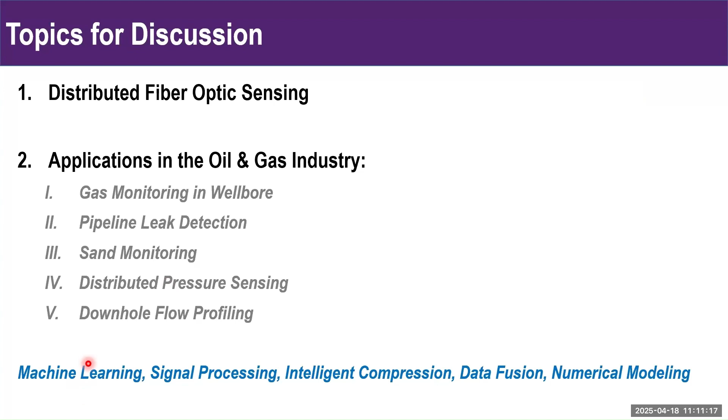All of these different applications I'll share are from my research group, and throughout these different application areas, you'll see how we used machine learning, signal processing, intelligent compression, data fusion, and numerical modeling. All of those different techniques will be built into each of these case studies that I'll present.

The spectrum of that light gives us a lot of information about different physical variables such as temperature, strain, and so on. Now, the biggest advantage of distributed fiber optic sensors versus traditional gauges is the distributed sensing capability. Hence we have distributed in the name, which means the entire fiber is acting as a sensor, versus a point sensor or point gauge, which only provides information at one location.

So say if we have a 500 foot long fiber, we'll have 500 feet of sensing. So we have very high spatial resolution of data, and that gives us a much better understanding of the dynamic environment. For instance, in a well bore, which can be thousands of feet long, especially in offshore wells, or in pipelines with hundreds to thousands of miles crisscrossing the country, a few discrete gauges will not give us the full understanding of the dynamics of the process. That's where distributed sensors are a game changer, because the entire fiber is giving us this information.

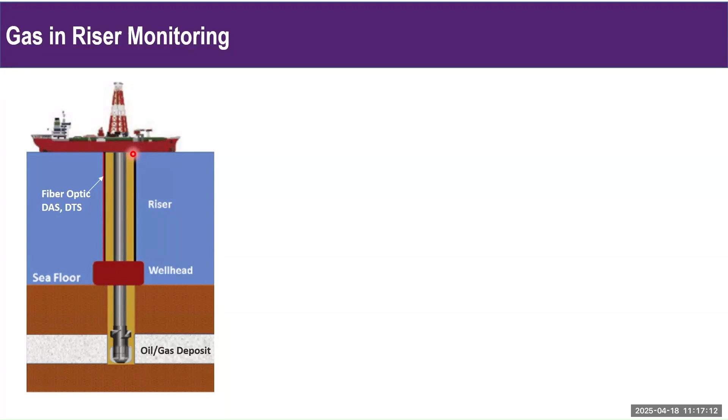Sadly, this is what happened during the Deepwater Horizon blowout incident in 2010, when hydrocarbon gas entered the wellbore and was not detected in time, creating an explosion on the platform, and sadly many people lost their lives. So we wanted to come up with sensing technology that can help prevent this from happening.

One of the challenges with the current state of the art is that we typically have sensors only on the wellhead and on the platform, but as you can see in the schematic, the whole wellbore is very, very long.

Even between the platform and the seafloor, we have what's called a riser, which can be thousands of feet long. So we have sensors at only a few locations, in this case the platform and wellhead, and we don't have a good understanding of the fluids in between, thousands of feet of basically a blind spot.

That is what creates a very dangerous situation, because many times these hydrocarbon gases are dissolved in the fluid. Because they're dissolved, they might suddenly come out of solution as the pressure is lower at shallower depths, and now we have hardly any time, because maybe the gas is 100 feet below our platform and will quickly rise up, and we just don't have time to control that, creating these types of accidents.

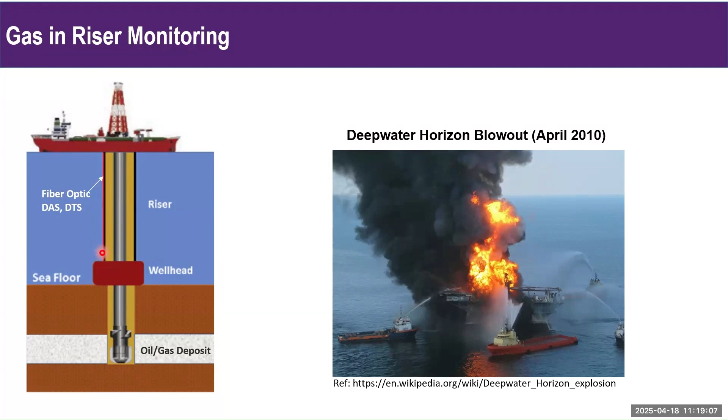This is where we believe fiber optic sensors can be a game-changing technology, because if I have a fiber optic sensor across these thousands of feet of riser, if gas comes in at any location along the riser, we can have an understanding of this anomaly and we'll have time to control it. As opposed to a point sensor, the fiber optic sensor gives us sensing along the entire fiber. This is the hypothesis we wanted to prove with our downhole test.

LSU has a very unique facility where we have six full-scale wellbores up to 5,000 feet deep. These wellbores are on our campus, which gives us a unique capability to do tests in a wellbore that we own.

Here you can see the picture where we installed DAS and DTS on one of our existing wellbores. DAS is distributed acoustic sensor, DTS is distributed temperature sensor. They were both within the same cable—it's one cable we are installing which has multiple fibers inside it.

This shows our well schematic. You can see that this well is 5,000 feet deep, so it's a full-scale wellbore. The casing is 9 and 5/8 inches, and the fiber is installed on the tubing.

We are trying to mimic the riser with our well, and we want to show that if we have a fiber in this type of setup, and gas is introduced, mimicking a gas kick that can cause a blowout, entering the well from the bottom of the tubing, then we can detect it with this fiber in the well.

One thing I'd like to mention is that during the drilling process, this safety hazard occurs during drilling or sometimes during the completion process. We typically have drilling fluids which are mud—if you think of mud, it literally looks like mud, a very thick fluid with a bunch of clay and lots of chemicals, a very viscous fluid in the wellbore.

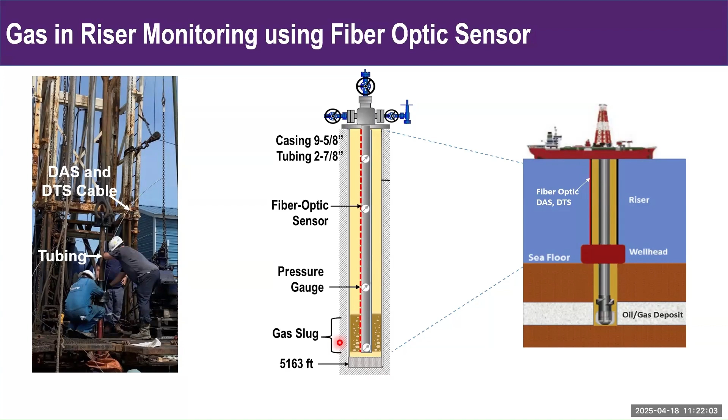So imagine the challenge here where we are trying to detect a very small bubble while it is still deep below, because if we detect it very close to the platform, then we hardly have any time to do any kind of control procedure. So we want to detect it while it is still away from our platform, deep below the formation. But it's a very noisy environment because you have mud circulating at very high rates. When we are drilling a well, you have very high flow rates, hundreds of gallons per minute, you have drill cuttings, and it's a very loud environment. Then you have mud as our other fluid, which is going to disguise the gas signal. So there's a lot of challenges in terms of detecting it.

We also use it to calculate the velocity, how quickly it is coming up. We call it a frequency wave number transformation of the data. Again, there are a lot of different techniques, and I'll show some references where you can go and look at the mathematical details of this transformation. But the key point is that just putting a fiber in the well is not going to give us the information. We have to take that data, do a lot of denoising, signal processing, in this case transformation.

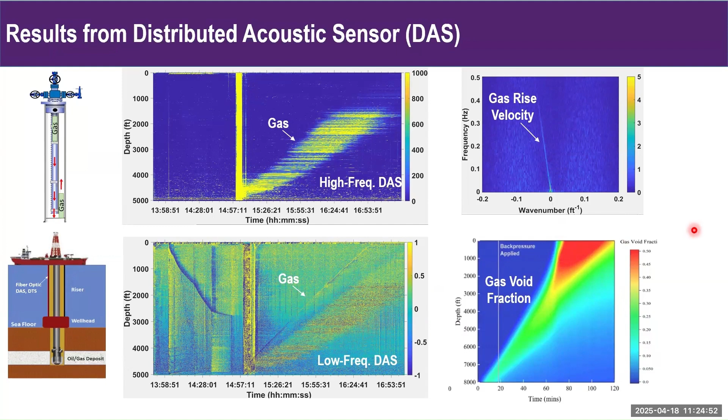So this is what we get using the fiber optic data.

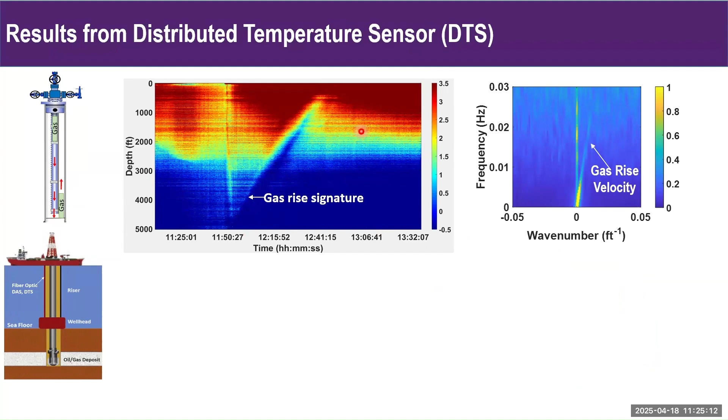We also use distributed temperature sensor. In this case, we are looking at the gradient of that, and you can again see the rise of gas. Again, you can imagine this can be a kick which is coming up the riser, and we can clearly see how quickly it is rising up. We calculate the velocity, and this gives us this information.

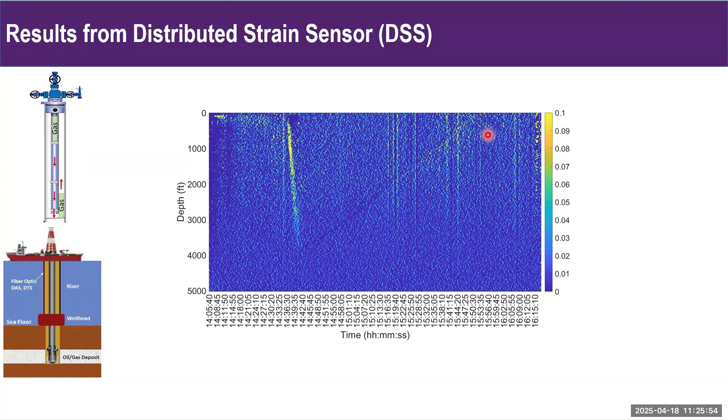Now, data compression is a very important aspect, because these sensors take measured data at high spatial resolution, high temporal resolution. We generate a lot of data.

So for instance, in a 10-second DAS data in our well, in our 5,000 feet well, is roughly 1 gigabyte, and this is just a 10-second data interval. You can see this equation which basically we use, so this is the spatial resolution, and our frequency of acquisition was 10 kilohertz. So 1 gigabyte in 10 seconds. Now imagine monitoring the well for several days, and it can even be sometimes even longer than that.

That is going to just generate an enormous amount of data that we cannot handle. And what makes it worse is if you are in an offshore kind of environment, we have very limited resources. We don't have a supercomputer on the rig floor, and neither do we have some kind of ultra high speed internet and so on. We rely on satellite data links to send our data. So a lot of this processing becomes a bottleneck very quickly.

You have this sensor, which is an awesome sensor giving so much data, which is great, but how do I actually analyze it quickly? So we have developed some methods. You can again look at these two references on how we compress our data. We also have some patents on the data compression, because this then we can convert it from gigabyte to kilobytes.

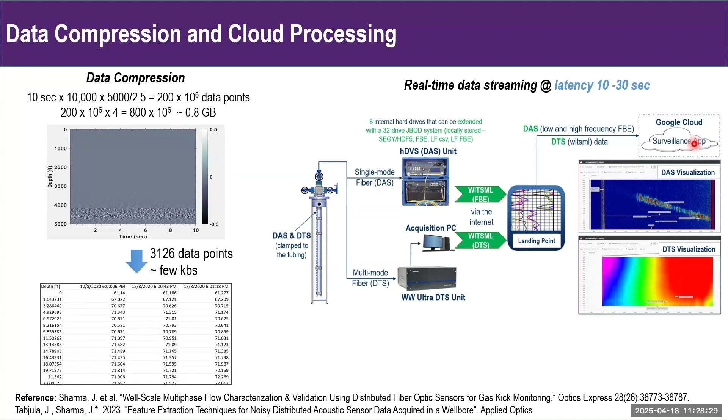In the end, in our wellbore as well, we compress the data and then we send it to a cloud server for further processing, because again, on a platform we will not have the computational resources. And even if it is not offshore, even in an onshore rig or onshore environment, these are remote places. We won't have high speed computers sitting in the field, so we have to send the data somewhere to a control site or centralized location for the analysis. So the data compression is a key step here.

And we also use machine learning to automate the process, because ultimately you may not have a fiber optic sensing expert who knows all this signal processing and can do all this in real time. So automating a lot of this so that the operators have an end-to-end solution is important.

So in this case, let me just show you. As the gas is coming into our wellbore, our MATLAB code - this is our MATLAB code running in the background - is automatically detecting the signal, as you can see here, and it is telling us the velocity as well without any human intervention. So this is fully automated. It's doing all the signal processing steps, from the compression, denoising, and then signal detection.

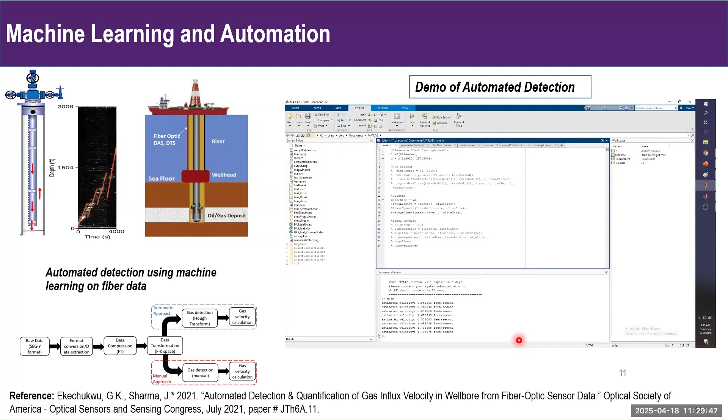And this is where our vision is, to make this technology viable for an oil and gas company, or any company for that matter, to utilize it in field application, because we do not have a fiber optic sensing expert available 24/7. And by the way, these drilling operations are 24/7, it can be in the middle of the night or whatever time. So automation is the key to make it faster and to make it viable for use, because as I mentioned, it's practically the best way to go forward with these sensors.

Now, again, going on the same machine learning scheme, we did a lot of different experiments with different gases, different circulation rates, different wellbore fluids. We wanted to create a repository so that when someone is testing things in the field, they can use some of our trained models and help in looking at those signals of interest in the field.

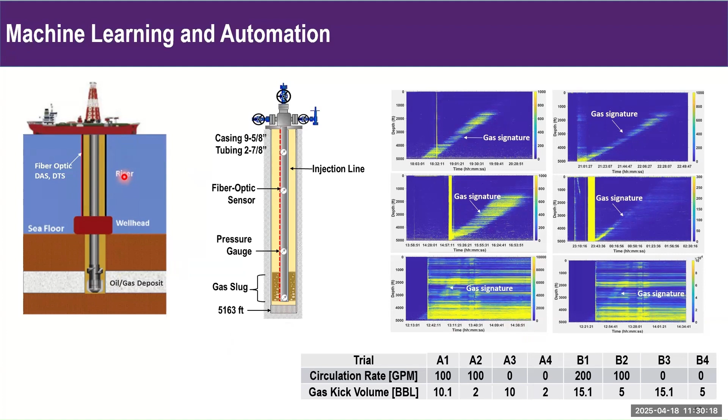There's a lot going on when we are drilling a well or producing a well. You have multiple fluids in the wellbore, circulating at high rates. There are drill cuttings, there's sand, there's very noisy signals which we have. And even in this case, with the gas being small bubbles, they have very weak signal as compared to others.

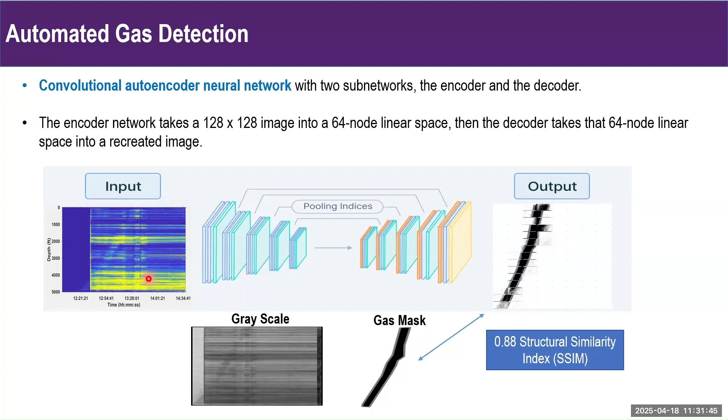So denoising this to actually get the final gas signal, as you can see, this is our mask, which is what an expert in fiber optic sensing will draw. So this is like our manual gas interpretation, and this is what the machine learning model predicts. We are trying to teach how to get from here to here by doing all those signal processing steps.

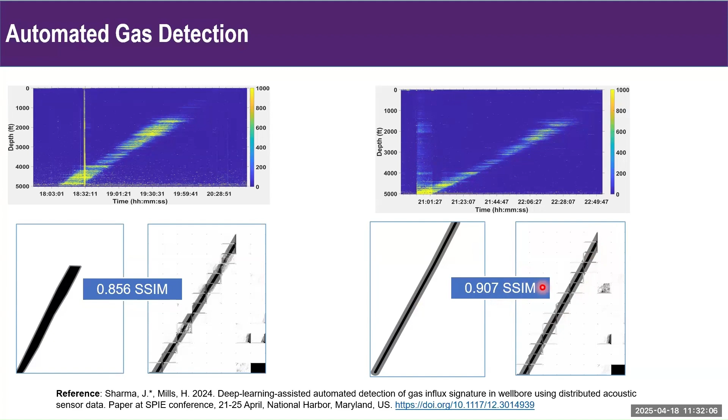That's where automation is going to be the way to make these sensors viable in the field. So we have done this on many different data sets, and it's not 100%. This SSIM is just a structural similarity index - we just see how closely the prediction is matching our own interpretation. So it's not 100%, but it is pretty good for practical use.

So I mentioned signal processing and denoising multiple times, and I cannot emphasize enough how important this is. Imagine if you have a 10,000 feet wellbore, and the signal that is coming from the 10,000 foot is actually much weaker because you have more optical losses the longer we go. Of course, technology has evolved to a place where we don't have a lot of signal losses, but still we have signal losses. So denoising is very important.

And doing frequency domain analysis is actually one of the key things that we do, along with a lot of mathematical transforms. Because when you have a broadband type of noise, we can isolate it in the frequency domain a lot of times. And sometimes once you transform the data mathematically, you can again isolate different types of signatures, and then you basically invert that. So that's kind of the high level way of doing this.

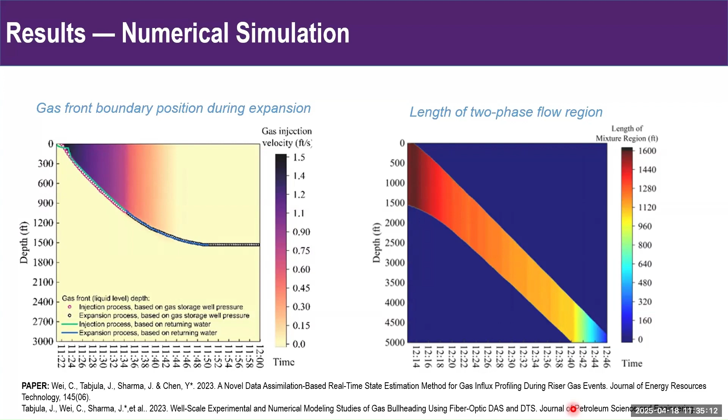Versus with a fiber optic sensor, for instance, in our case we have 5,000 feet of high spatial and high temporal resolution data. So in terms of validation of a numerical model, this is a very, very rich data set. And I would say that that is the biggest scope for any application in distributed sensors - to validate the digital twins and come up with a verified model that can be then upscaled to any kind of operating condition.

Leak monitoring is another big application of these sensors. Pipelines are very long and you can have a leak at any location along the pipeline. Typically we have these pressure gauges at multiple locations, but if the leak is very small, the pressure gauge may not actually see the signal at all because the pressure change will be very small.

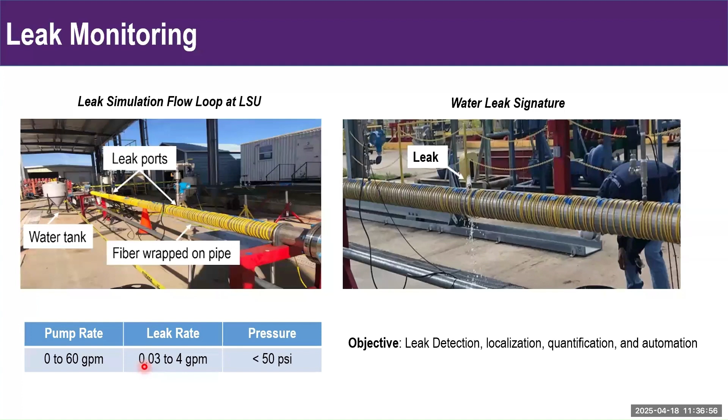Once again, the signal to noise ratio and denoising is very important here because the pipeline has all other things going on around it as well. So ultimately, how do we know the signal is from a leak versus something like a cow walking near the pipe, or a car going through, or, in this case, if it is an acoustic sensor, it's going to sense everything in the environment.

But the takeaway message is that if I just go and buy a fiber and put it on whatever structure I'm monitoring, that alone is not going to give you all the answers. It's how you then take this data and process it such that we now see the useful information. This mapping is where a lot of effort needs to be put in, because a lot of times the signal is there, but it's just not clear enough. There's a lot of noise and environmental parameters that have to be removed to look at our signal of interest.

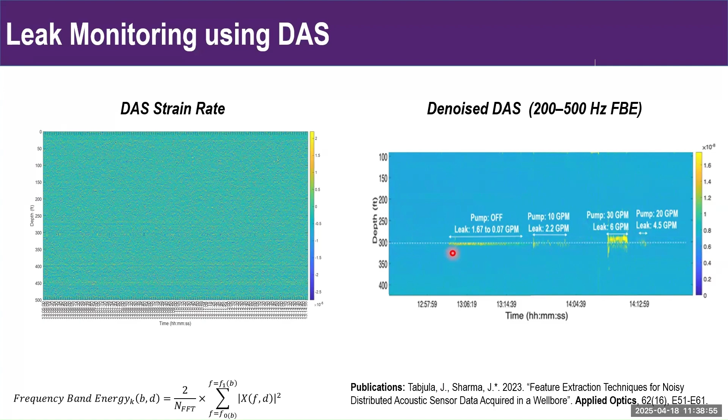I've already mentioned data size is an issue, and it is, because as you all know, pipelines are very long, so data compression is very important. The good thing about our transform is that it not only clearly shows our signal of interest, but also reduces the data size significantly. In this case, we are going from megabytes of data to kilobytes of data, which for a pipeline operator is very, very easy to handle. Our pipeline here is small, but even if these pipelines are very, very long, in most cases, it is data that you can handle.

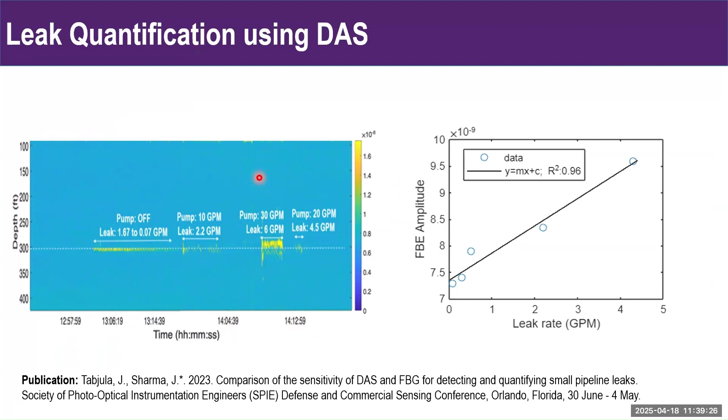We also use this to quantify the leak - how much is the leak? There's a quantification algorithm that we have developed both for pipeline and also for well bore. So if you have fiber in the well and you have these fluids flowing at different flow rates, how much is the flow rate? You can see here the intensity that we extract from the fiber optic measurement is converted into a flow rate using our algorithms, which you can see in this paper.

Although I'm not going into the details of all these processing steps because of limited time, what I do want you to appreciate is that the data can actually be used for many, many different things. The same DAS information I can use for leak detection, for measuring flow, for measuring velocities, and that is where the beauty of these sensors comes in. You can do a lot with it and develop high fidelity numerical models that are very well validated with a dense data set.

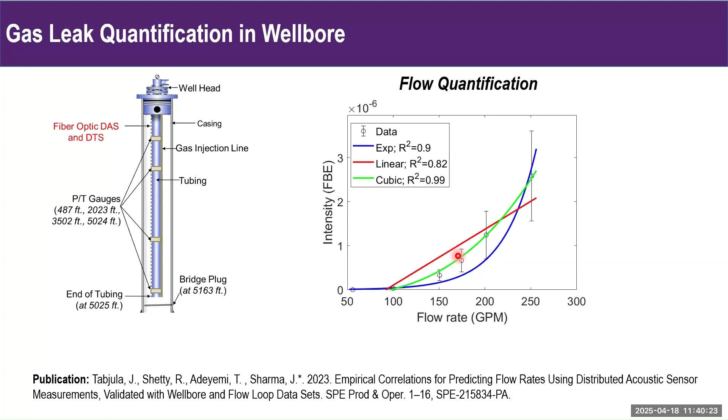Now, one thing we wanted to do here is, say if I only have a DAS - only a distributed acoustic sensor - what is my confidence of detecting these very small leaks?

And again, this very small meaning a pressure gauge will not detect a change in pressure, which is the current state of the art. We use pressure gauges typically for detecting leak rates, or rather the presence of a leak.

So the goal is, can I just use DAS or can I just use DTS? How much will be my false alarm rate if I only use one type of sensor versus if I use multiple types of sensors together? So if I do data fusion, because the same cable can have multiple fibers, as I mentioned, that's a big advantage of fiber optic sensors. So will I gain something by using multiple sensors or not? That's what we wanted to test in this particular project.

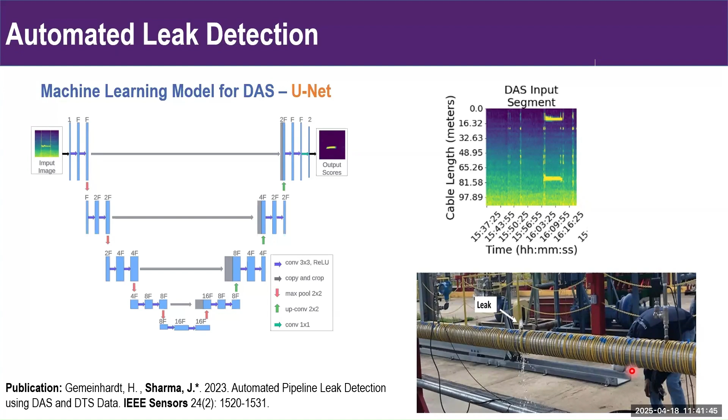So we started with just using distributed acoustic sensor data, and we used this U-Net algorithm. You can see that when we do a lot of signal processing, we do it in the frequency domain, and when we apply different frequency filters, the accuracy of detecting the leak is different. So that is another thing: the frequencies of interest for a leak in this case versus a car passing by or some other thing will be very different.

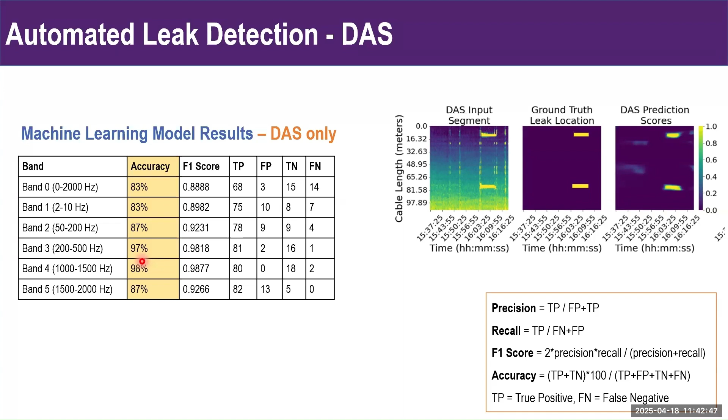So there is an initial calibration stage where, depending on your pipe, the type of fiber, how it is installed on the pipe, and your configuration, you can do some initial calibration to identify which frequencies will be for your liquid flow, for your gas flow, at least in a broad range. We may not be able to identify exactly that one frequency, but it will give us some idea.

We want to minimize false alarms for this. But because temperature can change, not just because the liquid is leaking out of a location, but it can change because of anything - like if there is cloud cover, or a change in weather, or change from day to night - temperature can change because of hundreds of different reasons. So DTS alone can give you some false indications that there is a leak.

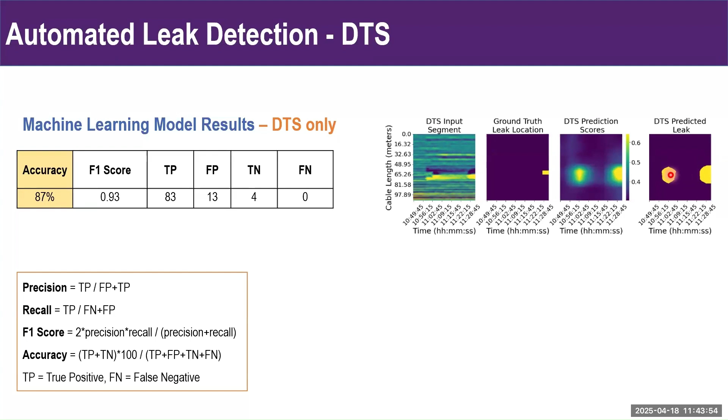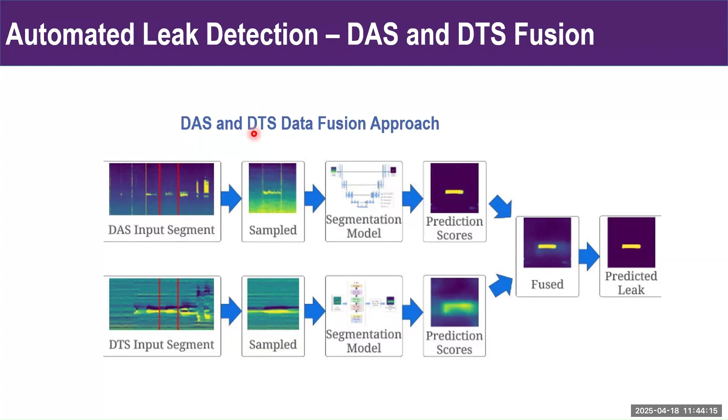So what we did was data fusion, where we are not just using DTS but also DAS. Because if the temperature is changing, for instance, because of the cloud, the DAS is not going to be affected at that location. Whereas if DAS is being affected because of a cow walking nearby, the DTS is not going to be affected because of that. So at a high level, that was the hypothesis. And that's what we saw - the false alarm rate was significantly reduced when we did this data fusion.

And because these cables enable us to do multiple sensors, this is a great way to actually make full use of these sensors by combining multiple types of sensors to reduce our uncertainty, because there's a lot of uncertainty even in wellbore, in pipelines, or any application in that case.

There is uncertainty because there are a lot of interpretations, and someone can say, oh, I don't think that is happening. But once you have independent measurements from different sensors, that builds our confidence that yes, this is the case.

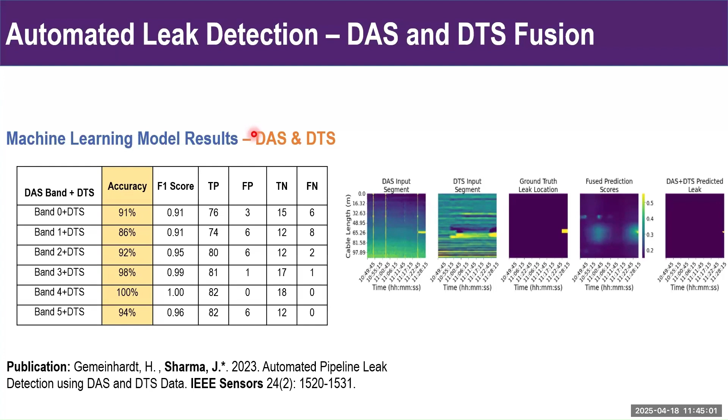Pressure measurement is another very important thing, and we have developed an algorithm where we can take just DAS and DTS as the input, only two inputs, and we utilize machine learning and signal processing to come up with a pressure output, because pressure is like a fundamental parameter or variable that helps in controlling the process for safety. Many different industries, not just oil and gas, across almost every industrial process require pressure measurement.

So here, pressure is often measured using a gauge, which gives pressure at one point. But if you have a well bore, say 5,000 feet of well, what if I want pressure everywhere? I want pressure at 100 feet, 200 feet, everywhere.

And this is what we have tried to do: if you have a fiber which is telling you DAS and DTS, can we combine this to give us pressure? We have a patent on this methodology and a paper in Nature, and you can look at how we have done it, and see that when we compare our predicted pressure, we do that at different depths, because this is distributed pressure, meaning pressure at multiple locations simultaneously.

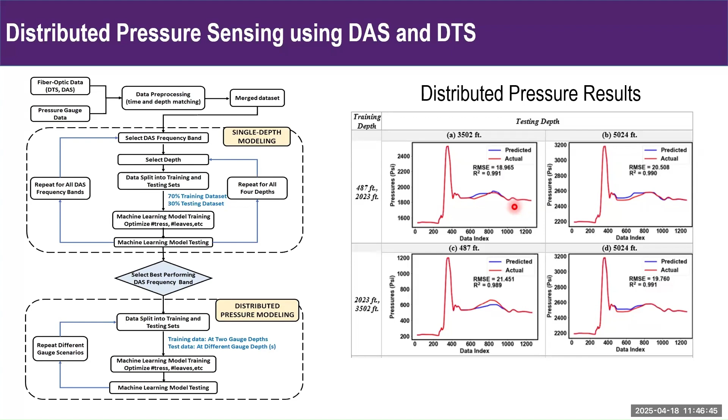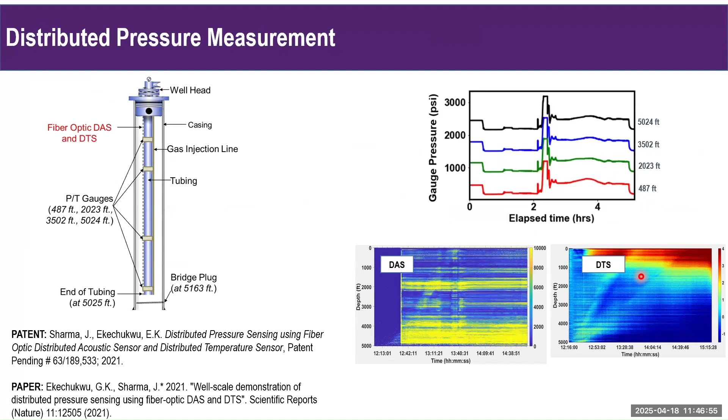You can see a very good agreement between our predicted pressure using this algorithm and the actual pressure which we measure using the gauge. Many different companies and researchers are working on the hardware side. We have also developed some early prototype of actual hardware which can give us distributed pressure. In this case, this is an algorithmic approach where my hardware is just a DAS and DTS, which is commercially available today, whereas a distributed pressure sensor hardware is not commercially available today. So we can do it in both ways.

Now, what we wanted to do is see if the fiber can help us look at where the sand is coming from. A lot of times in the reservoir, there are certain zones where the sand is more unconsolidated, meaning it's loose, so there is more probability of sand getting sucked in from that location. We wanted to use fiber installed in the wellbore to help us identify those locations which are producing more sand, so that we can do a targeted shut off of that location so that sand doesn't come in.

We also wanted to use the fiber to look at the speed at which sand is traveling, because that dictates the erosion of our pipe. These pipes are made of steel, but with a lot of sand, they get eroded over time, and the higher the velocity of sand coming in, the faster it cuts through our pipe. So that velocity is key in making sure our pipeline can withstand those high flows of sand particles. So we wanted to do that with our fiber.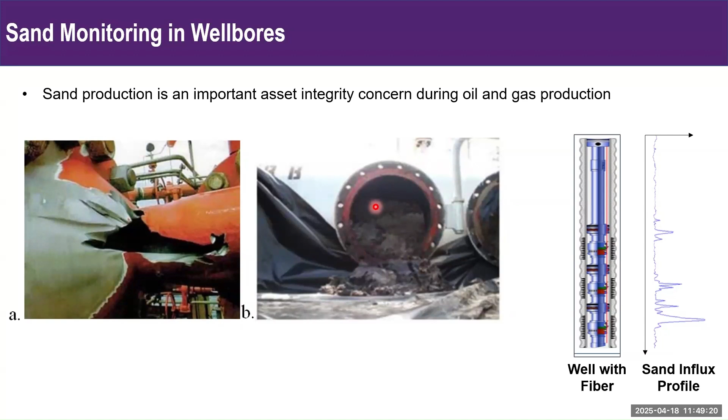This was a project in collaboration with Shell, who were specially interested in looking at offshore wells, because offshore reservoirs in the Gulf of America have a lot of loose, unconsolidated sand, so there's a lot of sand production there. Especially when there are hurricanes and the offshore platforms are shut in for many days, as soon as the well starts producing again, there is a big plug of sand that comes in. So sand is a major issue there.

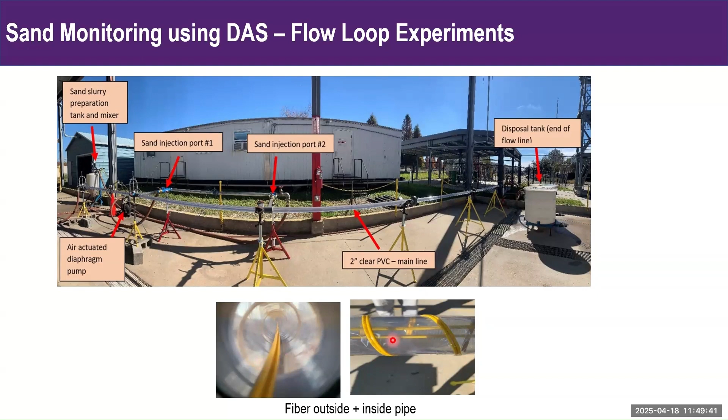So we first wanted to do lab scale experimental modeling. This is our pipe, a 40 foot long pipe in our LSU research lab, and we had fiber inside it and outside it. We wanted to see how easily the fiber can detect those sand signals.

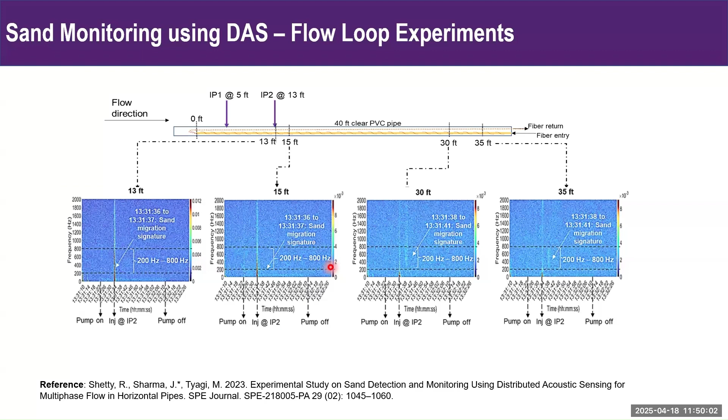You can look at all our algorithm in this paper, but we did a lot of spectrum, like waveform analysis, to come up with this frequency fingerprint of sand, because sand is flowing with your oil, water, gas, but the sand is going to have a different frequency signature versus the other, and that's what we wanted to isolate.

We also did analytical modeling to compare our data, the results from the fiber optic sensor, for instance the velocity value, with an analytical model for validation, because validation is very important with fiber, since there is a lot of interpretation involved. We want to make sure the velocity, which dictates how quickly my pipe will get eroded because of the sand, is well measured. So we validated it with analytical models.

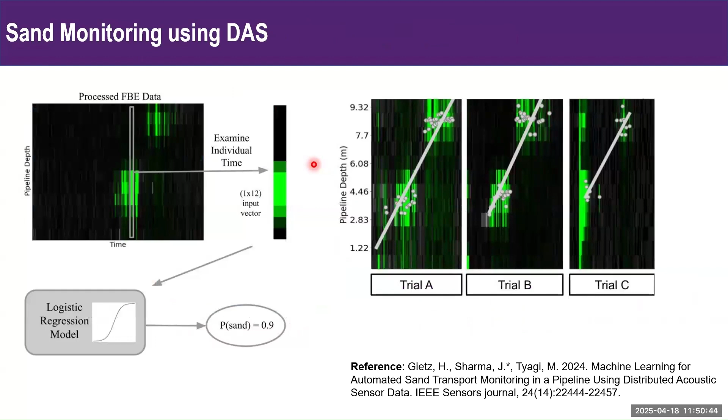And again, we use machine learning to automate this, because this will help the operators to actually utilize this for their practical applications. We also do computational fluid dynamics modeling to basically upscale this data.

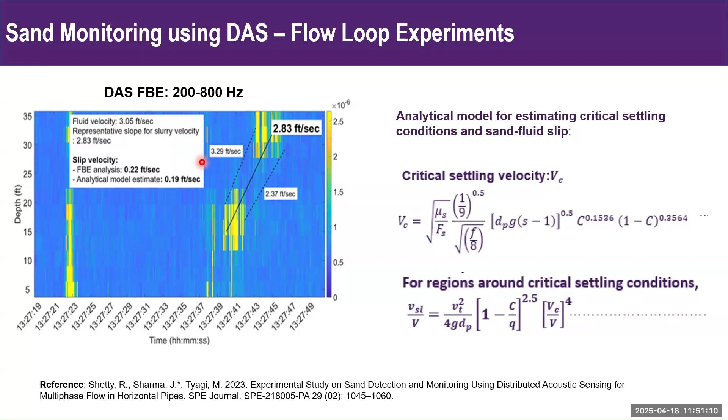Our pipe is only 40 feet long, but offshore wells are thousands of feet long. So how can the company we work with, Shell in this case, use data from our 40-foot well bore to convert that into the pressure and temperature they're operating at? This is where CFD modeling and initial validation with modeling that can be upscaled to different operating conditions can be very helpful.

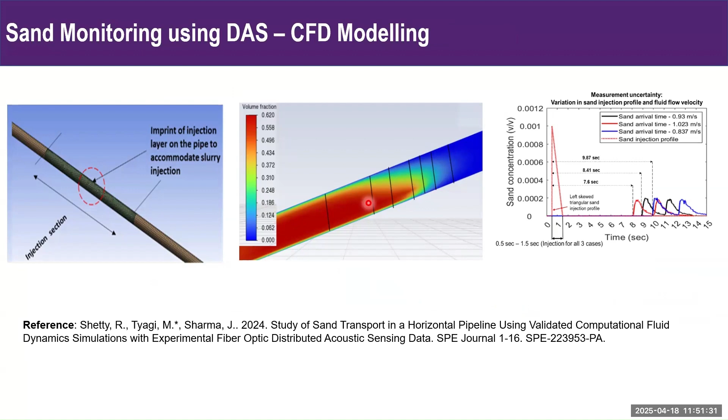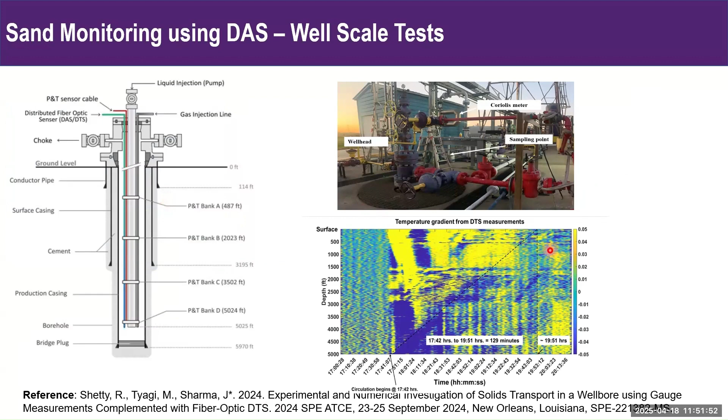Of course, things are very different in the field, but this gives us some sense of how to optimize our observations. We also did sand experiments in our well bore, because we're fortunate at LSU to have our own well bores. This paper describes how we used DTS to look at the migration of sand.

This final application is for flow profiling. This was a collaboration with a company working in California, injecting steam in horizontal wells. The biggest application of fiber optic sensors right now is flow profiling, which is relevant for injection and for hydraulic fracturing with multi-stage fractures. We need to know where fluids are going and where they're being produced from, because these wells can be very long - you can have 30 to 40,000 feet of pipe, and we need to know where the fluids are.

In this case, they were injecting steam but weren't sure if it was going everywhere. The reason for steam injection is that the oil is very viscous - 200,000 centipoise, compared to water which is 1 centipoise. It's almost like peanut butter. Without heating it, it's not moving anywhere, so we have to introduce temperature to melt it, almost like melting butter, and then the fluids flow.

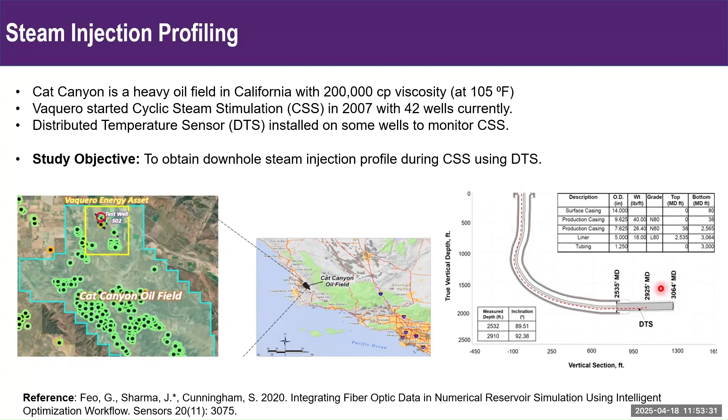However, if I inject steam in this long lateral but it just shoots off in one location, then I'm not heating the full well bore. And steam is expensive - you have to boil the water, generate high pressure steam, compress it, and inject it downhole. All of that is very expensive. So this expensive steam I'm injecting downhole, I want it to heat the whole reservoir. The steam injection conformance is very important.

Unfortunately, that's what was happening - their steam was only going out from what we call the toe, the end point of the well. Having the fiber, we created a numerical model for them and integrated the actual fiber optic data. Their well had a distributed temperature sensor, which we used to validate our numerical model, and then came up with a steam profile which showed that the steam was going out preferentially.

Once we know the steam is all leaking out at one location, we can go back and put in some inflow control valves, for example, so that the steam is distributed uniformly across the whole well, because we want it to heat the whole reservoir - at least the formation of interest - rather than just leaking out at one location.

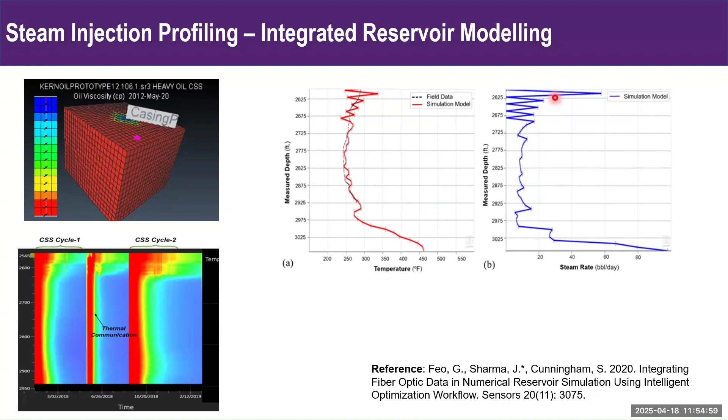If you're interested, you can look at this paper where we integrate the data with a numerical simulator, because in oil and gas, using numerical simulators is like bread and butter. We use it for everything from forecasting and predictions to understanding the dynamics in the reservoir. Having fiber optic data gives us the opportunity to integrate that with our numerical models to make them more reliable when we predict, for instance, how much production we'll get, or how much steam is going to different locations.

Okay, so with this, I'll stop here.